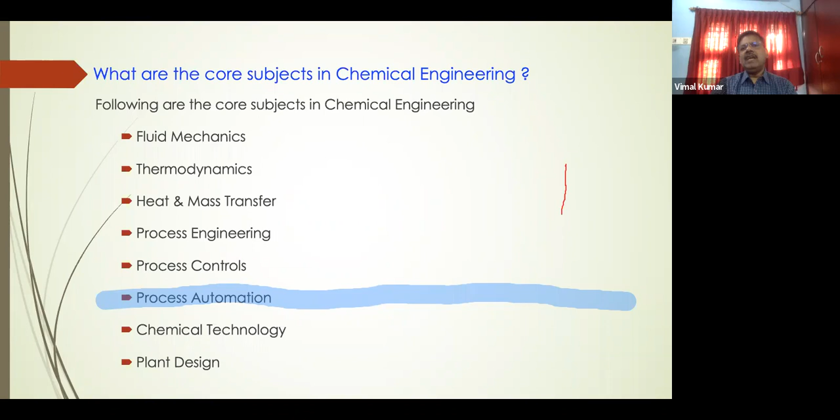Probably, if you are a fresher, maybe you will feel all these subjects are jargon to you. But I will not get into that in detail. Instead, I will try to help you identify which are the areas where you will specialize when you complete all these core subjects. So today I will be talking about 5 major areas where you will specialize when you study these subjects. The first one is machinery and equipment.

As chemical engineers, you will basically be taught about machinery and equipment in your curriculum. So what is machinery and equipment? When you really want to understand this, machinery is something that rotates, equipment is something that is stationary. In all process plants, irrespective of the type of chemicals being handled, there will basically be machinery and equipment. So I will give you a brief of what the machinery is.

If you look at the machinery, you will basically be learning about pumps in chemical engineering. When you talk about pumps, there are two major classifications: one is centrifugal pumps, the other is reciprocating pumps. Each has a different application.

For example, if you take centrifugal pumps, they are used for large volume and medium pressure. The one you are seeing on the left is the centrifugal pump, called multi-stage centrifugal pumps, between-bearings pumps. If you go into the details and classification of these centrifugal pumps, there are a large number of models: cantilever pumps, simply supported pumps, single stage pumps, multi-stage pumps, pumps with gland packings, pumps with mechanical seals. It goes into a large number of classifications.

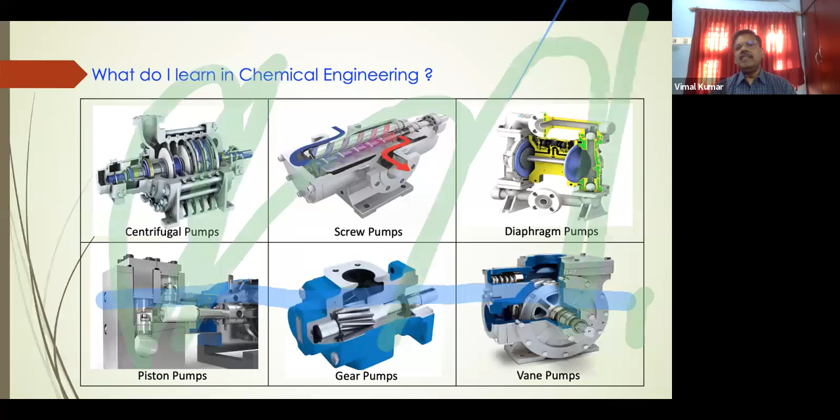So today what you should understand is there are two major classifications of pumps: one is centrifugal pumps, another is reciprocating pumps. Centrifugal pumps are used for handling large volume and medium pressure, and reciprocating pumps are used for high pressure, medium volume. But in both cases, these pumps are basically used to transport process fluid from one place to another. This is the purpose of a pump.

If you go into the detail, there may be a lot of categories like centrifugal pumps, screw pumps, diaphragm pumps, piston pumps, gear pumps, vane pumps, and so on. This is only to give you an idea. There are pumps used in the chemical industry, and these pumps are basically required to transport liquid from one place to other.

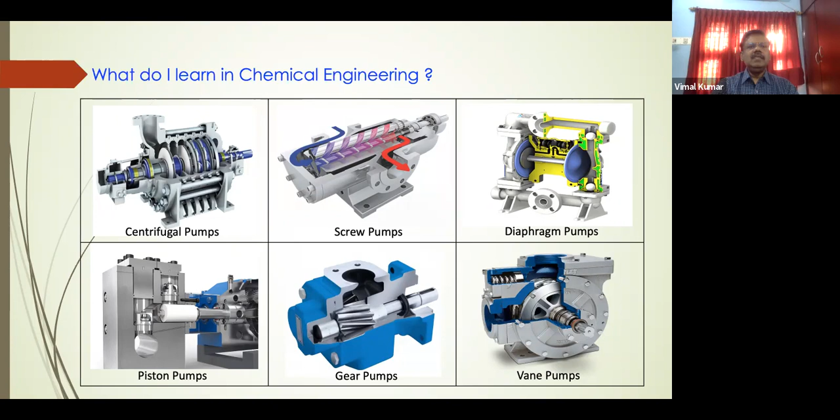Here the same principle applies, but in compressors the centrifugal compressors run at a very high speed. They can go even up to 15,000 and 20,000 RPM. RPM is revolution per minute. Every minute these compressors will rotate more than 10,000 or 15,000 or up to 20,000 RPM. So this is the purpose of a compressor in a chemical industry.

So we have noticed two types of things. One is pumps used to transfer the process fluid. Second is compressors used to transfer the process gas from one place to other, or used to boost up the pressure of the process gas.

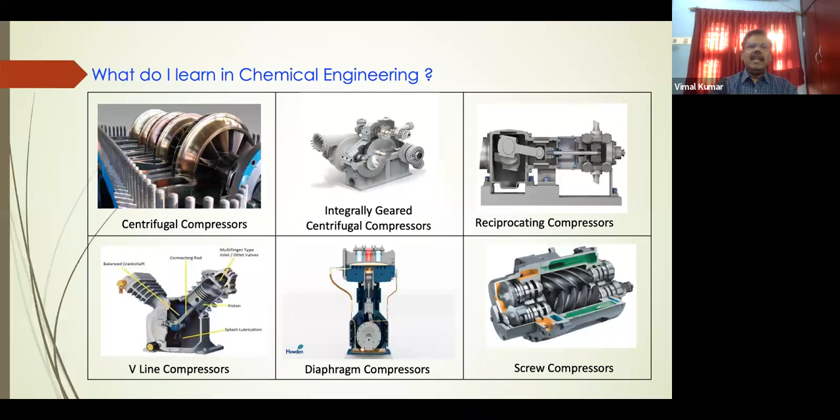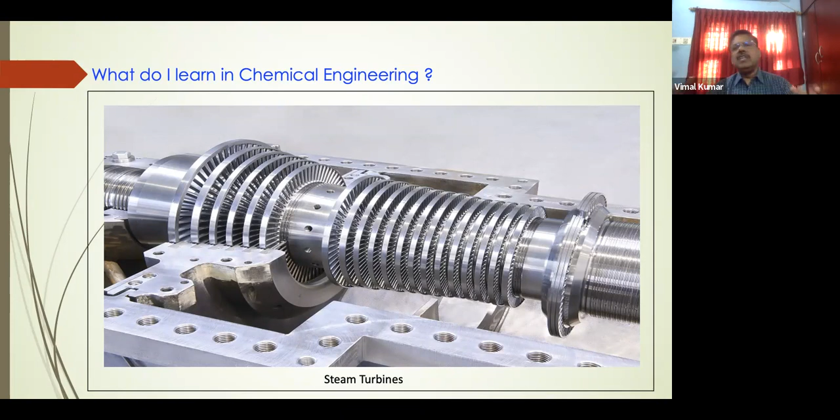So these type of steam turbines are highly critical machineries. Even if you do a small mistake, this will land up in a huge crisis for a chemical plant. So these are given a lot of importance for running a chemical industry. This is very critical. Also, these type of steam turbines are coupled with a power generator for generating electricity. For example, in a thermal power plant, these type of steam turbines are normally coupled with a power generator to generate electricity.

Not limited to steam turbines, there are also gas turbines used to drive the equipments. There is a difference between the steam turbines you saw and the gas turbines you are seeing here. Those blades are called impulse blades, whereas these blades are called reaction blades, which you will understand more in detail in the course of your chemical engineering. These type of gas turbines are used in a huge way in Middle East countries because gas is available in plenty there. So gas turbines are used as a driver equipment for driving the compressor and pumps.

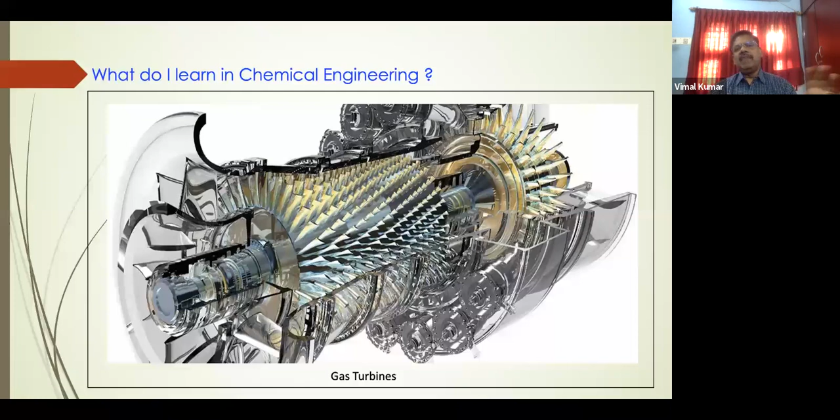Whatever I referred earlier are used in a major way in refineries, oil and gas. Coming to a little low-end plants, like ordinary chemical plants, petrochemical plants, fertilizers, all these plants use some more additional rotating equipments called centrifugal fans. These centrifugal fans do not create a high pressure; they create pressure just above the atmospheric pressure, but they handle a large volume of air. Similarly, centrifugal blowers also develop a pressure just above atmospheric pressure, but they handle air to a limited volume. So they are called centrifugal blowers.

The next one you see is the screw conveyor. These screw conveyors are used to convey the material from one place to other place. The same way, the one on the left corner is the belt filters. The belt filters are used to filter the slurry and separate the solid product from the liquid product. These are used in phosphoric acid plants.

The next one you see is the rotary drums. These are used in cement industries and also in diammonium phosphate plants, mainly for granulation purpose and for homogenization purpose. The next one is the rotary valve, wherein you have to maintain vacuum in the system. These valves are used for maintaining a vacuum in the system, as well as handling the on and off service for regulating the flow inside the vessel.

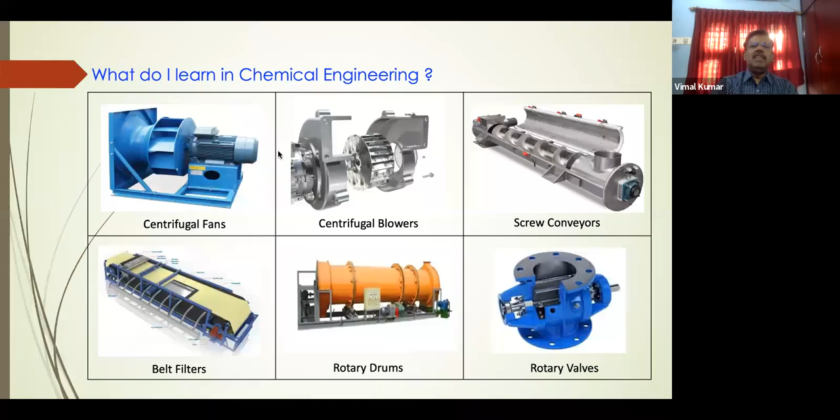Now we will look at some stationary equipments found in any chemical industry. These equipments are available in hundreds. For example, in a refinery, you will find a minimum of 1,000 heat exchangers.

Heat exchangers are used to exchange heat from one medium to another, from liquid to liquid, or gas to liquid, or liquid to gas, without physical contact. The one you see on the top left is a heat exchanger, called a U-tube heat exchanger.

The next one is the stacked heat exchanger, where you need to manage a large volume of fluid. The next one is called the breech lock exchanger, used for handling process liquid or gas at very high pressure, requiring a proper sealing arrangement achieved through breech lock heat exchangers.

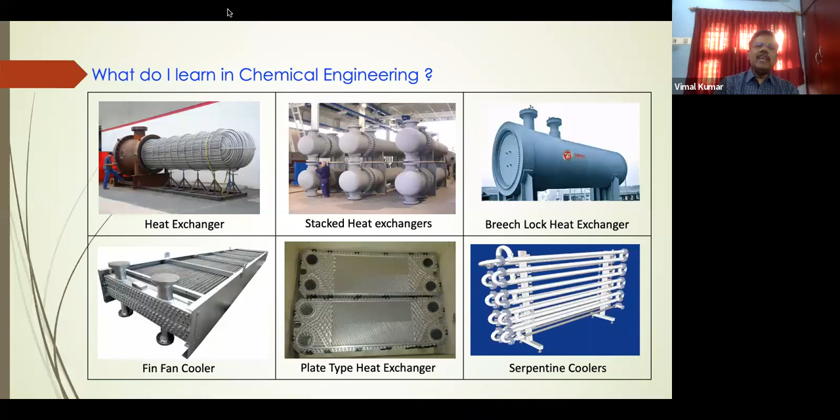To consolidate, there are four major types of heat exchangers used in chemical industries: fixed shell and tube heat exchangers, U-tube heat exchangers, floating head heat exchangers, and kettle reboilers.

Every heat exchanger has a different purpose, and each has a different operation and maintenance methodology. Now we will see how you get a feel of what a heat exchanger is, and how you take out a heat exchanger for maintenance.

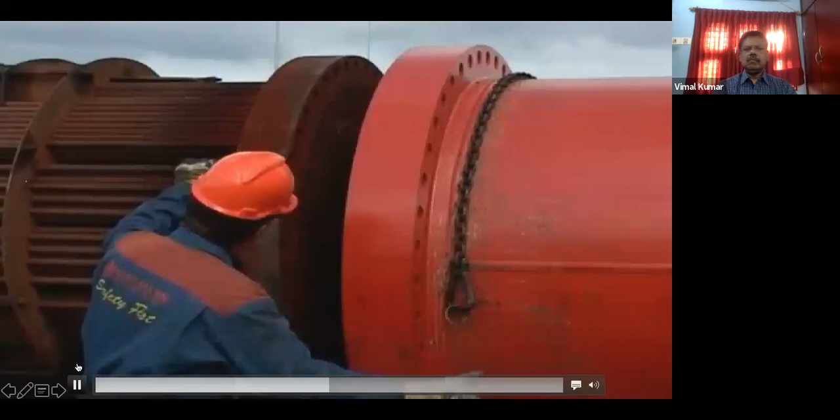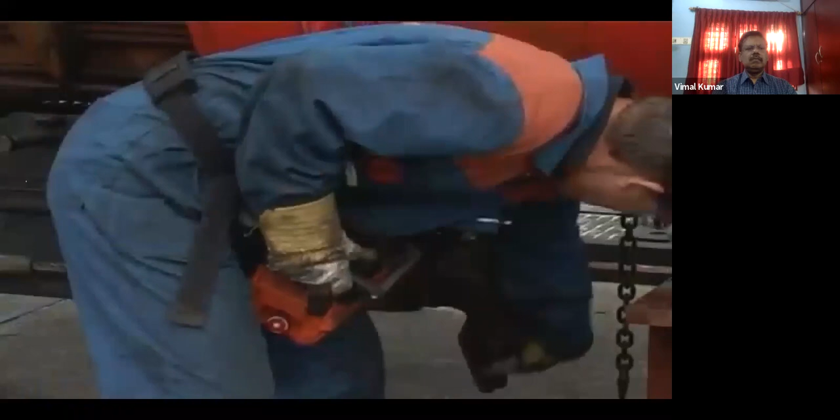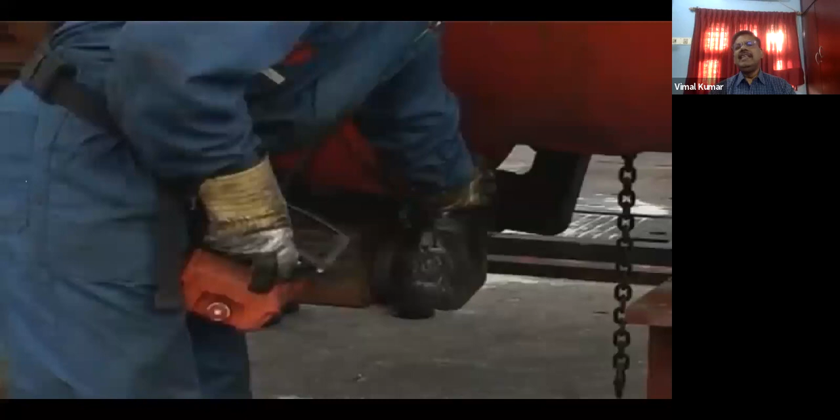What you have seen is a hydraulic method of pulling out a tube bundle from a heat exchanger and then putting it back after cleaning the tubes inside and outside. These are called bundle pullers, now widely used in refineries because of the weight involved and, from a safety point of view, all chemical industries recommend the hydraulic method of pulling out tube bundles.

Thirty years back, when I was a maintenance engineer, we did not have this technology. We manually pulled out tube bundles using chain blocks and other mechanical tools, but that is no longer allowed in refineries. What you are seeing now is the recommended method for pulling out the tube bundle.

You will also notice how the tubes are cleaned.

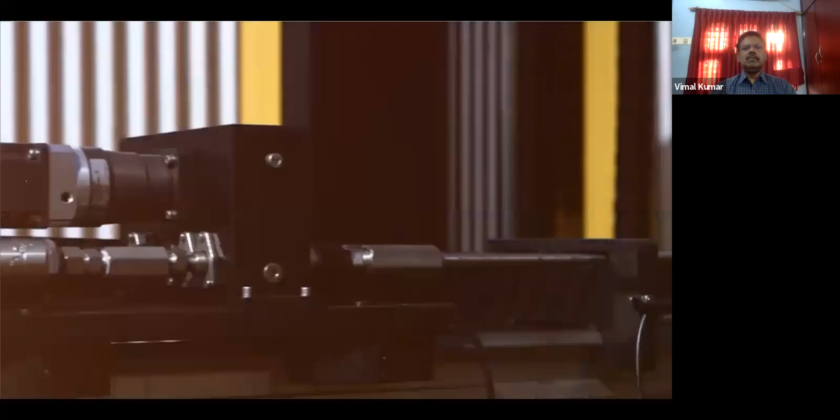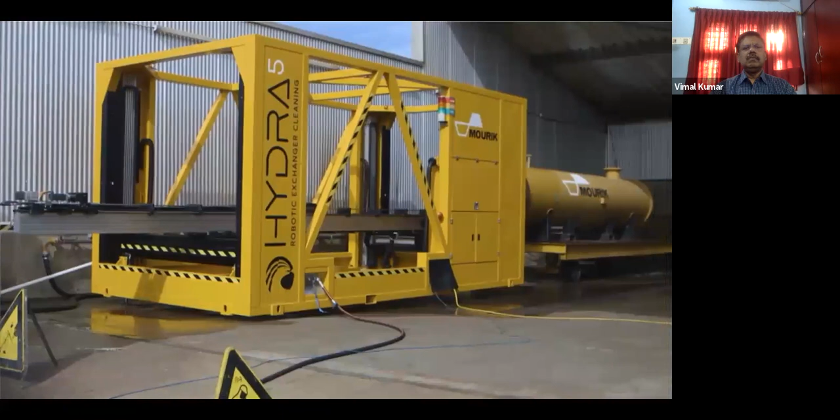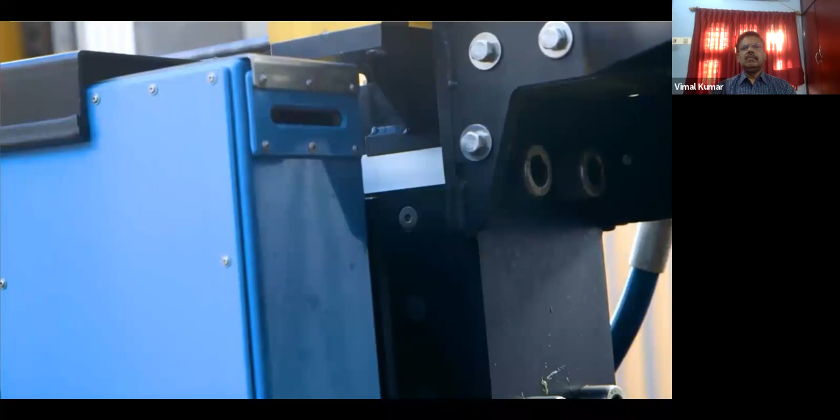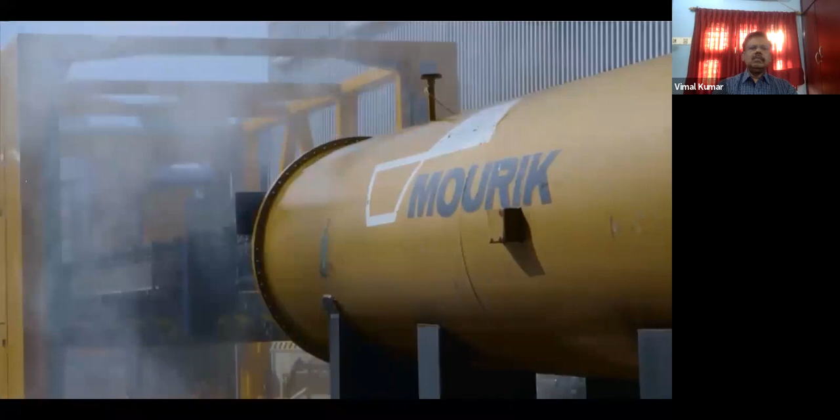We believe we're on the eve of a revolution in industrial cleaning, a world in which robots collaborate with humans to do professional jobs safely, in control, and of immaculate quality. This world is no longer science fiction. Today, Mourik takes the next step into the future: Hydra. The new Hydra 5 enables Mourik to be the first to move automatic internal tube bundle cleaning from a lab environment into real practice. Hydra reads its environment and ensures unrivaled cleaning without human intervention. Five rotating lances autonomously clean the tube bundle with a powerful high-pressure jet, all at maximum speed and pinpoint precision. Hydra constantly monitors all parameters and adjusts its method to avoid damage. The increased speed and efficiency result in substantially lower consumption of water and fuel, mitigating the environmental impact.

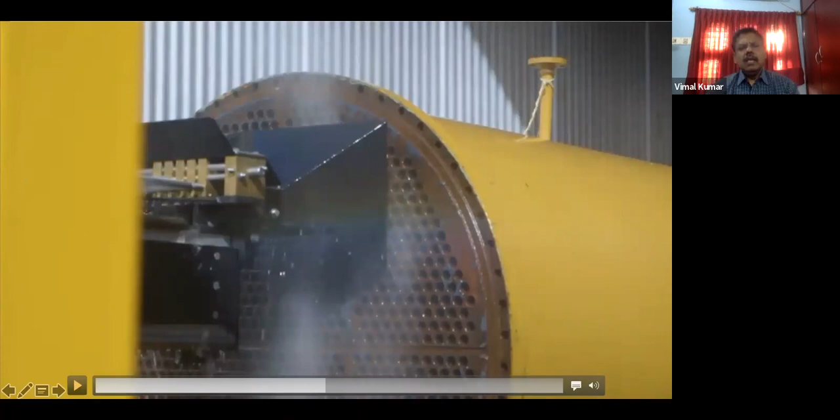In those days, this cleaning was happening manually, but that is no longer the practice now. Things have improved a lot, with complete robotics now used in cleaning heat exchanger tubes. This has taken over the whole market because of the speed, precision, and safety it offers.

So this is what we have seen, and these exchangers are nowadays cleaned with high precision robotic machines. No more manual cleaning is involved. But from a chemical engineer's point of view, all these operations come under your control. You are the person who is going to operate the plant. You are in charge of a plant. Every single activity in a process plant will happen only with your knowledge and clearance.

So now, next to the stationary equipment like heat exchangers, what you are seeing now is a fired heater or a furnace, wherein heat is again exchanged. But here what happens is, you will be firing with a fuel oil or a fuel gas inside a closed vessel or a closed furnace, which will help to crack the heavy hydrocarbon chain, which will help you to break or vaporize the heavy hydrocarbon chain. This is the purpose of a fired heater.

Once the hydrocarbon chain is broken, the gas gets passed to a catalytic reactor. These are all equipments highly critical for an operation engineer from the operating point of view, because these catalytic reactors are filled with catalyst to aid the reaction, to help the reaction, to accelerate the conversion. So these reactors again fall into many categories. There are fixed bed reactors, there are catalytic tube reactors.

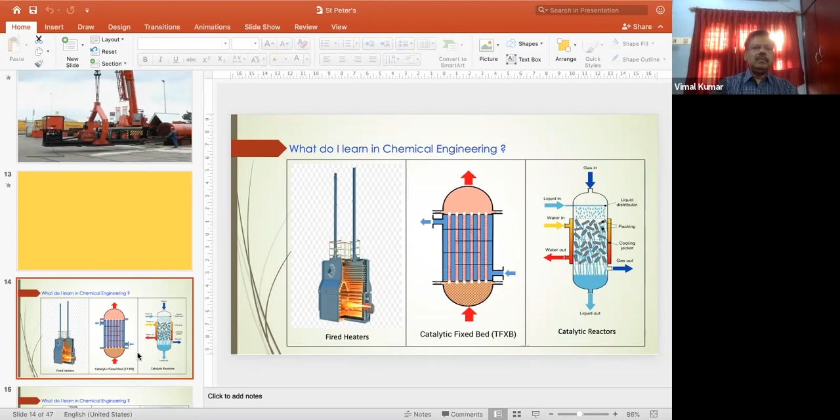So the next one will be the fractionator, absorber, regenerator. Actually, in a refinery, the heart of a refinery is the fractionator. What is actually happening in a fractionator is, all different types of product or end product are taken out based on the boiling point. For example, kerosene, petrol, methanol, ethanol, coke, hydrogen. So in this fractionator column, at every stage, based on the boiling points, the product is taken out.

For example, ATK, aviation turbine kerosene, the kerosene which is used in aircraft, is taken at a different stage. The kerosene used for domestic purpose is taken at a different point. The petrol is taken at a different point. Then you have coke, the residue that is collected at a different point. Then methanol, then hydrogen, something like that. The fractionator is the heart of a plant. So you will learn a lot in your chemical engineering about this fractionator.

The same concept applies for the absorber. What is really happening in an absorber is, when you collect the gas, it will have a lot of unwanted gas in it. For example, acidic gas will be present in the end product. So we want to remove that unwanted component. How do we remove that? That is called amine regeneration, amine absorption. For example, you will charge lean amine solution to go and scrub the acidic gas, which is called absorber. So that gas, when it comes out, will have the acidic gas completely absorbed. So if you take out the fuel gas, it will be acidic gas free.

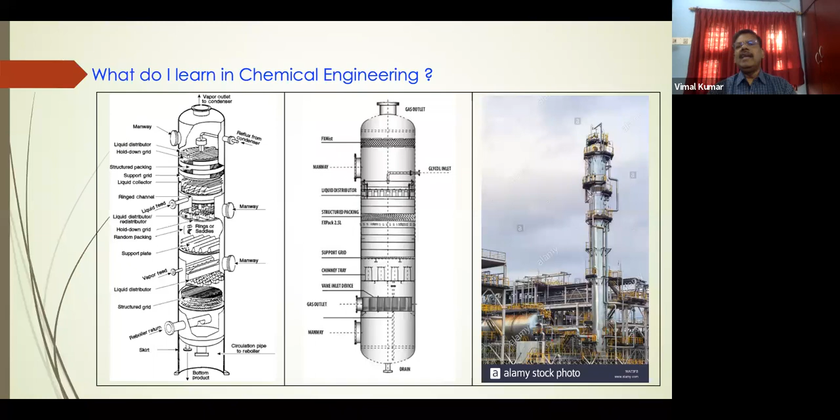Now, when you really understand all the basics and fundamentals of the machinery plus equipment. So all along you have seen rotary equipments, wherein you saw pumps, then compressors, then turbines, then a lot of low-end rotating equipments. Then you saw some heat exchangers, then fired heaters, then absorber, regenerator, fractionator, distillation column. Then you saw catalytic reactors. All these things, irrespective of wherever you are going to work, all these things will be present.

So once you understand the basics of operation of these equipments and machinery, that means you are fit to understand the process flow. What is process flow? In a chemical industry, you need a combination of rotary and stationary equipments to convert the raw material to your end product. This is called a process flow.

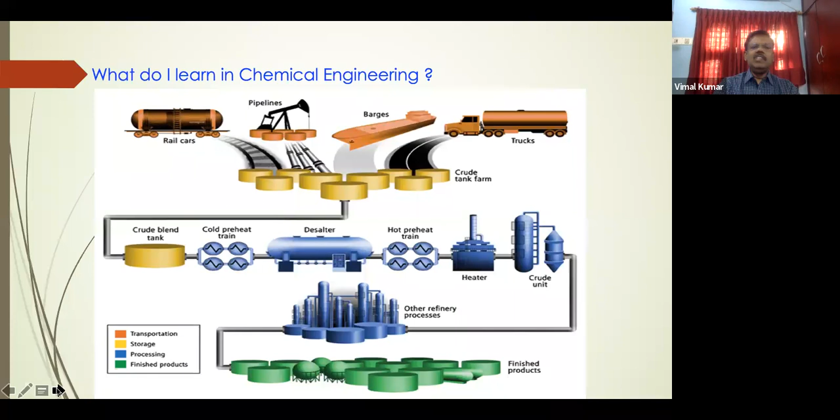This is, as I told you, the heart of a refinery. The crude is being heated up, then it enters into a distillation column. Based on boiling point, at different stages, the end products are taken out: gas, naphtha, gasoline, kerosene, gas oil, lubricating oil, heavy gas oil, and residue. So this is the heart of the plant, wherein you will become a master to know the in and out of a distillation column, and understand all the basics of this operation and the process flow.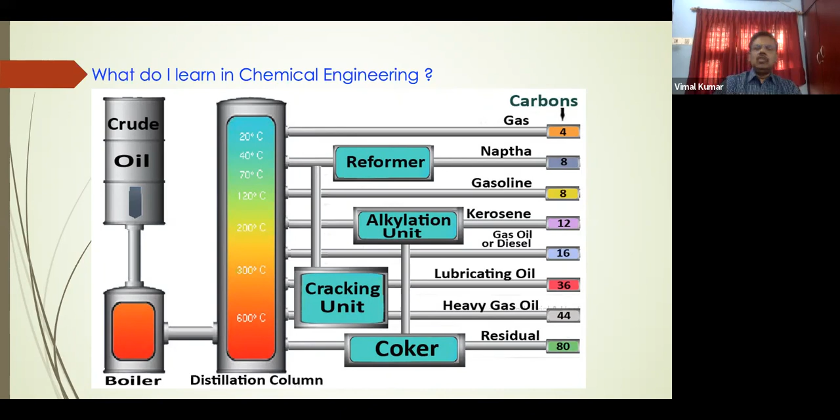How does this process really happen? This will be clearly understood by you in a process flow study. So, for example, I feel you should really see this video clipping, because you will clearly understand what is really happening in a refinery.

From the outside, an oil refinery looks like a small city - a city composed of pipes, tanks, and towers. But if you went inside, you might be surprised to find one of the most technologically advanced industries in the United States. Here, engineers and scientists have figured out how to turn raw crude oil into the valuable fuels, lubricants, and components we need to make millions of products.

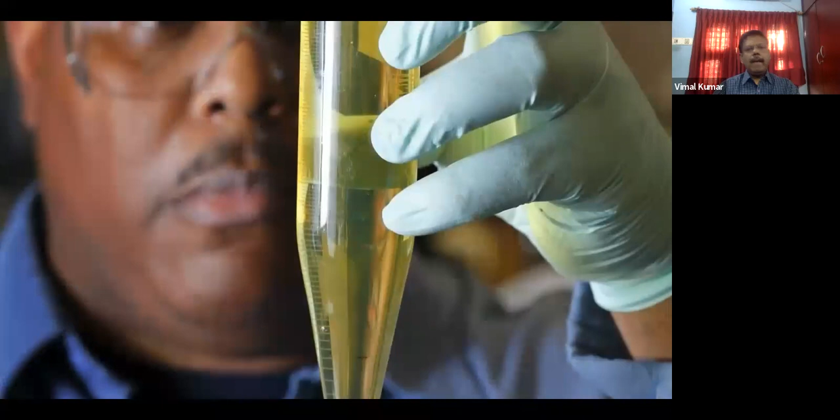Refining begins with a process called distilling. After oil is superheated, it becomes vapor. The vapor is fed into the distillation unit. As it rises and cools, the vapor turns back into a liquid. Using stacks of trays, the liquid is easily collected and separated by weight. The lighter and medium weight liquids require less processing before they're ready to be used in cars and trucks. The heavier liquids need more processing to become useful.

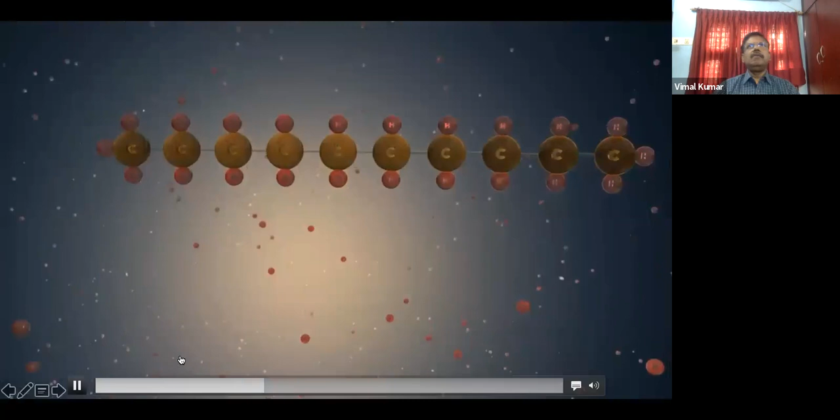A process called cracking is used to maximize the usefulness of heavy oil. Heavy oil has long strings of carbon and hydrogen molecules. Using a catalyst, these molecules can be broken into smaller chains, transforming the heavy oil into lighter, more valuable fluids.

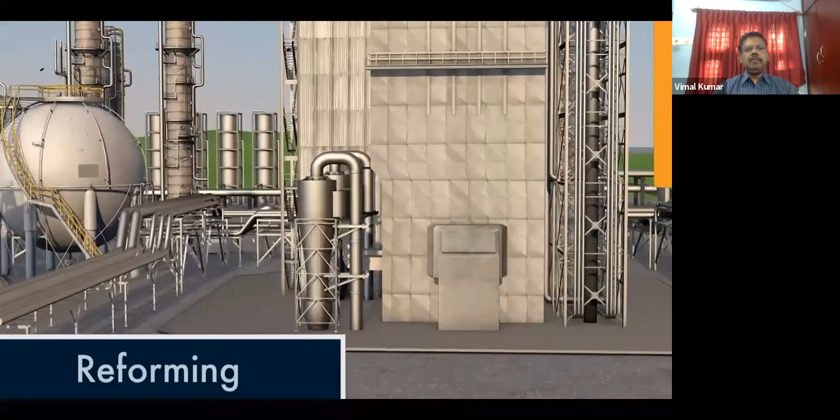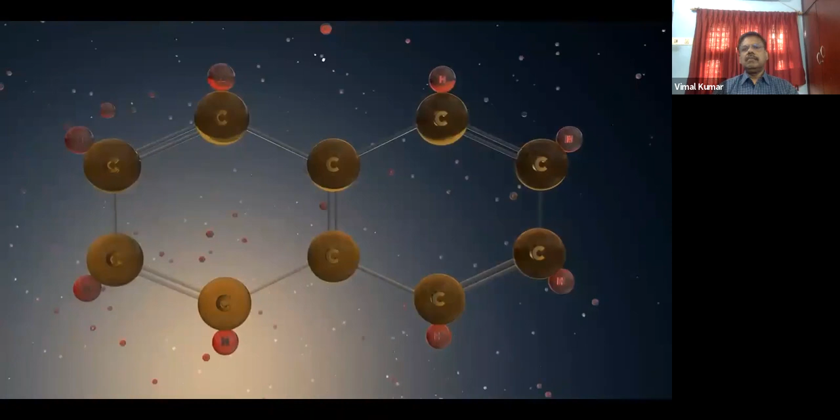Reforming is a process that increases the amount of gasoline produced from crude oil. One of the products separated in the distilling process is a liquid called naphtha. The number of carbon atoms in naphtha is about the same as the number found in gasoline, but their structure is more complex. Reforming rearranges the naphtha molecule, turning it into a usable gasoline-like molecule.

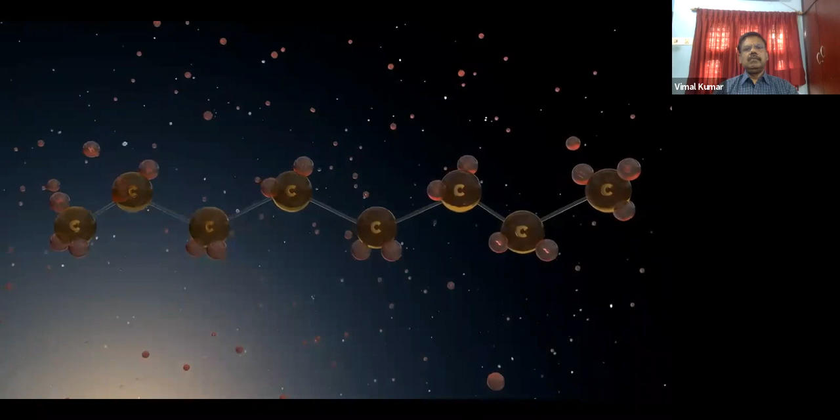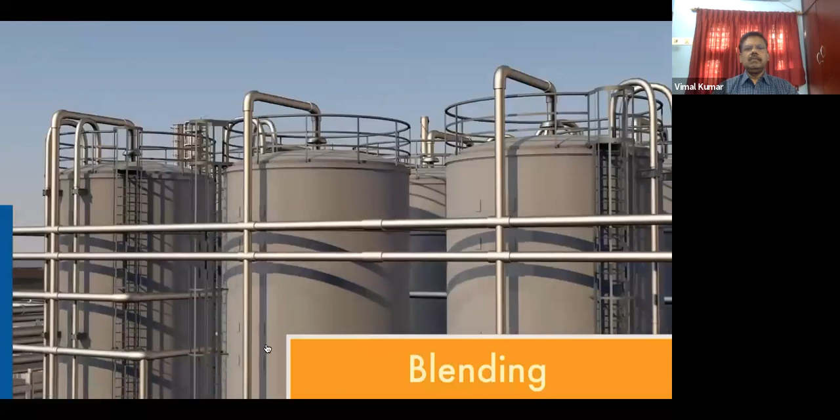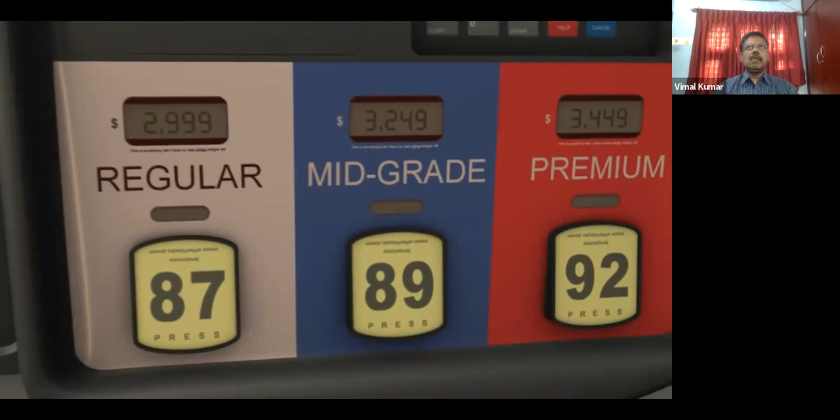Blending is a process of mixing different refinery products to make finished petroleum fuels. Gasoline, for example, is blended to achieve octane standards, creating the grades of gasoline you see at the pump: regular, mid-grade, and premium, that are necessary to meet the needs of specific engine types.

Treating is a process used to... I think now you should really feel proud of operating such a big refinery. Chemical engineers are the people who operate this complete refinery. So you should feel really proud to control the whole refinery.

For example, in India, there are so many refineries, but they are basically governed and operated by chemical engineers. Only then do the downline engineers come - for example, mechanical engineers, electrical engineers, instrumentation engineers, civil engineers - all these people are there to serve the chemical engineers. So chemical engineers should be very proud to operate a refinery in India, because you are the people who feed a variety of products to the country.

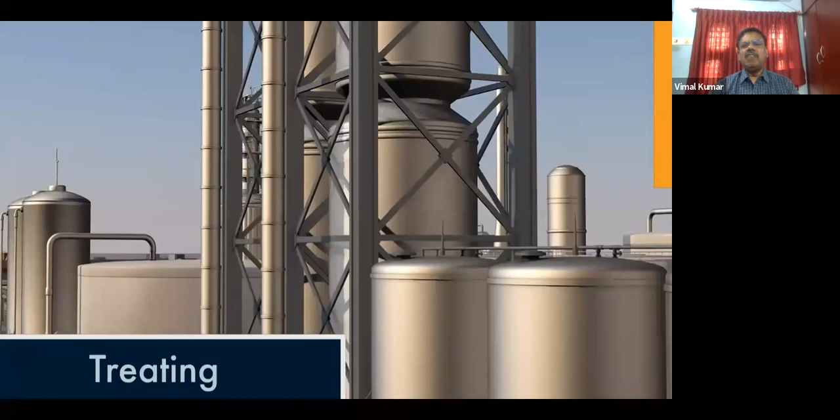Now, the moment you understand the complete process, you are fit enough to develop a process flow diagram, PFD. This is what really matters. So this process flow diagram, you become very conversant to read this process flow diagram.

This is what will be available in the refinery, or anywhere - these are all the documents available for you. So if you really become conversant in reading a process flow diagram, you will very easily understand when you get into any refinery what is really happening, what is the raw material, what is the end product, what type of equipment is used, what rotary machinery is used. If you see this process flow diagram, you must be able to understand there is a distillation tower, there are pumps, there are heat exchangers, there are various filtration units, there is a desalter - all these things you will be able to understand.

So now that means you have become an expert, or you have specialized on equipments and machineries, then you have specialized on process flow. So now you get into the third stage of your engineering curriculum, which really makes you specialize in process controls. What is really process control?

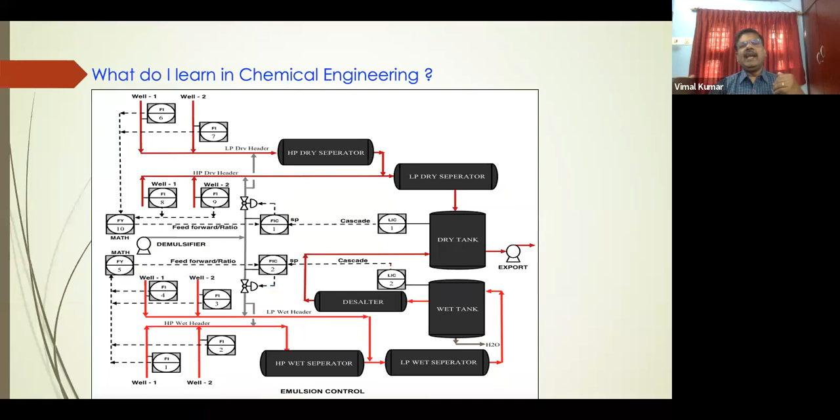So this is process control. The earlier diagram you saw was a process flow diagram, which was not having any control circuit. But if you see, this circuit is having a lot of controls. So for example, those diagrams are called PFD, process flow diagram. This is called P and ID, piping and instrumentation diagram.

So if you see in this image, you can see there are a lot of controls. For example, you need a controller to control the flow, a controller to control the temperature, a controller to control the level, and a controller to control the flow. So all these parameters you will be controlling by sitting in a central control room, which is operated by DCS, distributed control system. But also you should understand...

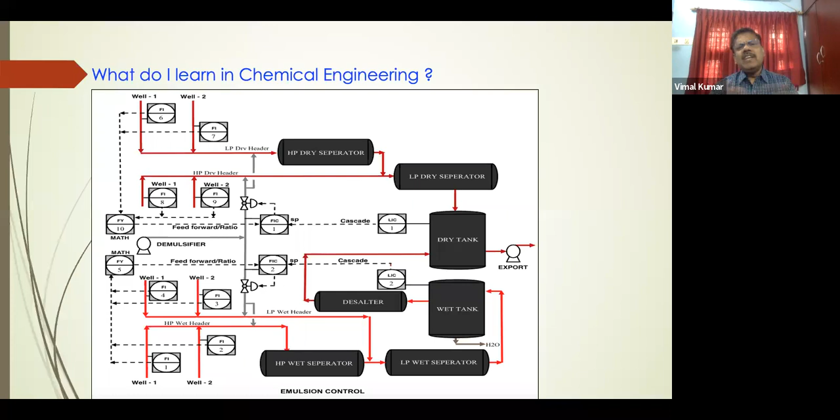Myself, I am a 30 years experienced in refinery. I belong to this category. The reason is I belong to a third generation category, whereas it is not the case for you. You are a fourth generation category. So what is the difference between third generation and fourth generation?

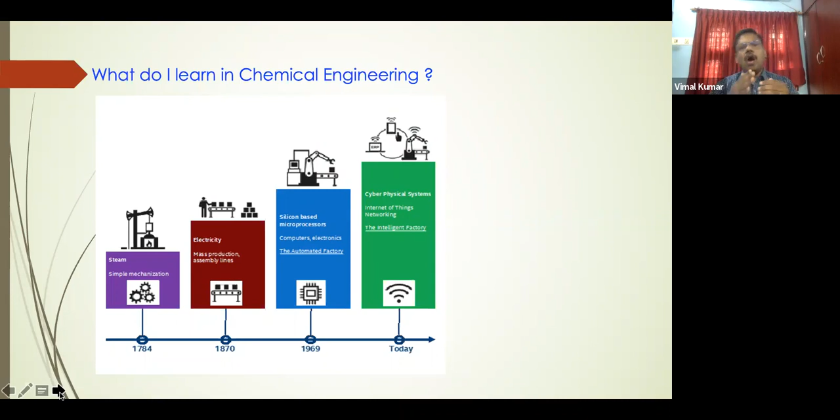This is the difference. The first generation was mechanical control. The second generation was electrical controls. The third generation, where I used to work, is electronics control. But today the whole world scenario has changed, and even the refinery has adopted the change where you, the fourth generation people, operate a chemical plant which is presently getting converted into IoT control, Internet of Things. So most of the controls in the refinery are getting converted into Internet of Things, IoT control.

This is what you are seeing now. Now this Internet of Things has gained momentum. So your life is getting more and more easy. You don't need to go around the plant to look for abnormalities, to look for any issues, any problems. You can sit anywhere to control the process parameters. This is what has really made a big impact on the present fourth generation engineering.

So all these things, for example, the crude oil unit will be located elsewhere, the tank farm will be located elsewhere, your refinery will be located elsewhere, but still you can sit in New York and control this. So that is what the Internet of Things gives you, an access to control your plant from anywhere. And also from the safety point of view, it helps you a lot. It helps you identify the issues, identify the gas leaks, identify any unwanted entry into the plant facilities.

I want you to see a small clipping on this.

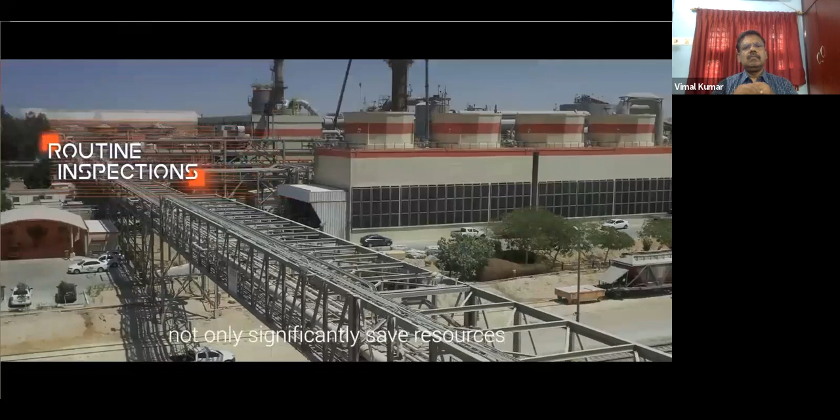This is a large mining facility. The possibilities for drones to create real value in a facility like this are endless. Let's see a couple of examples. Routine inspections with drones not only significantly save resources, but also prevent endangerment of employees performing them. Drones are also uniquely qualified to measure stockpiles like these, which has tremendous value in calculating inventory and preventing waste.

So are you able to understand? See, these type of drones are too much useful today for making a quick survey, quick inspection. Human intervention is not required. Then from the safety point of view, it is much, much helpful for our regular day-to-day activities in a chemical industry.

So we saw two things. One is Internet of Things has captured the industrial market. The second one is the drones, which the third generation engineers have not at all used, whereas you will be exposed to such type of advanced technology. So you can feel proud to be a chemical engineer.

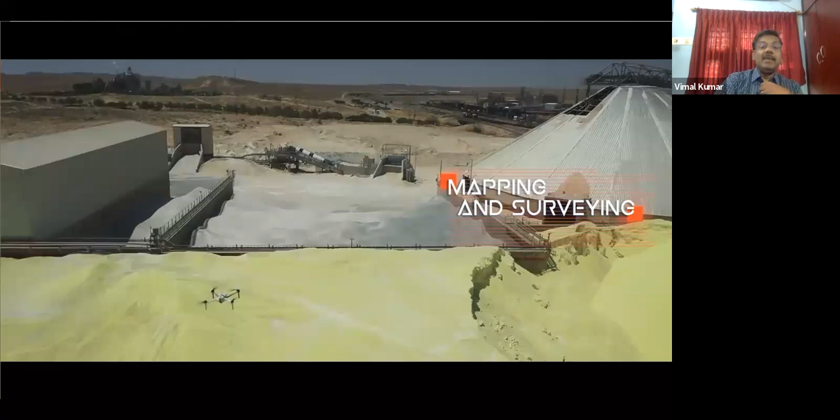So the next one, what is really happening in the chemical engineering field, in a chemical industry, is augmented reality, mixed reality, artificial intelligence, machine learning, chatbots. So all these things are gradually impacting the market in a big way. They are much, much helpful in a chemical industry.

If you see, your boss will be sitting in New York, you will be sitting in Chennai controlling the refinery, but you will invite your boss in New York to go for a walk around with him if augmented reality and virtual reality are mixed up. So today that's really happening.

For example, today chemical engineers are involved in designing a plant, you can see it in the picture. Plus, these tools are now taken inside the plant to detect any abnormalities, any gas leaks, any inspection activities. So you should be really happy and proud to know that chemical engineers are the engineers who really convert this world into a fourth generation market.

You will be really incorporating the technology of IoT, the technology of drones, the technology of augmented reality, virtual reality, mixed reality, then artificial intelligence. Artificial intelligence has really impacted like anything. It really helps you. Machine learning, for example, you have a problem in a compressor, it will advise you, the machine learning will guide you. Last year there was a problem like this, so you do the same operation, it will guide you, it will help you. So those type of real technology has impacted the process industries.

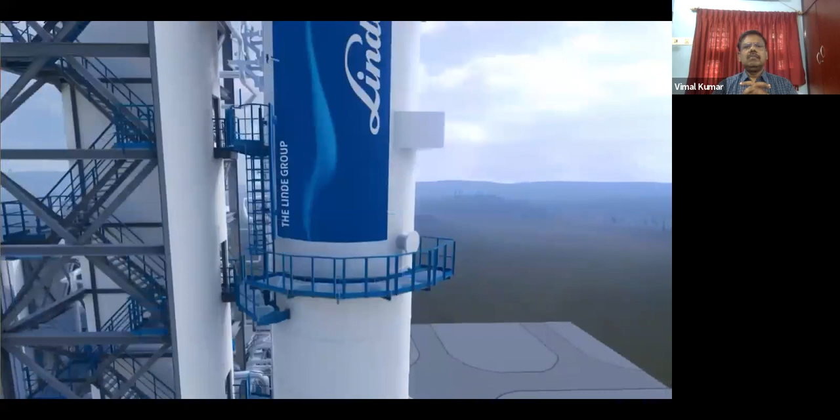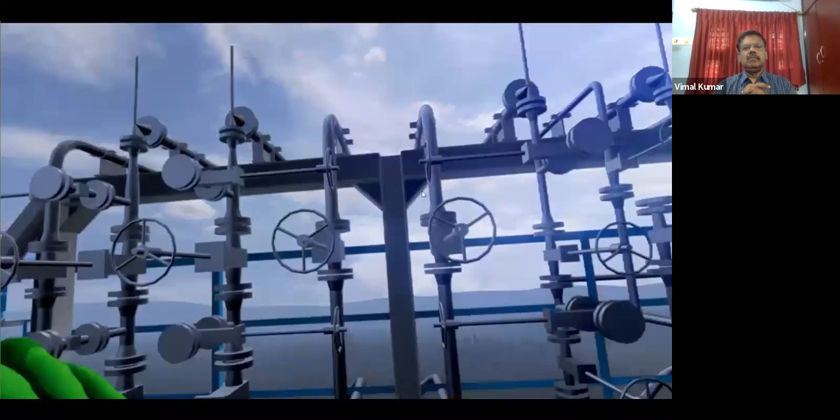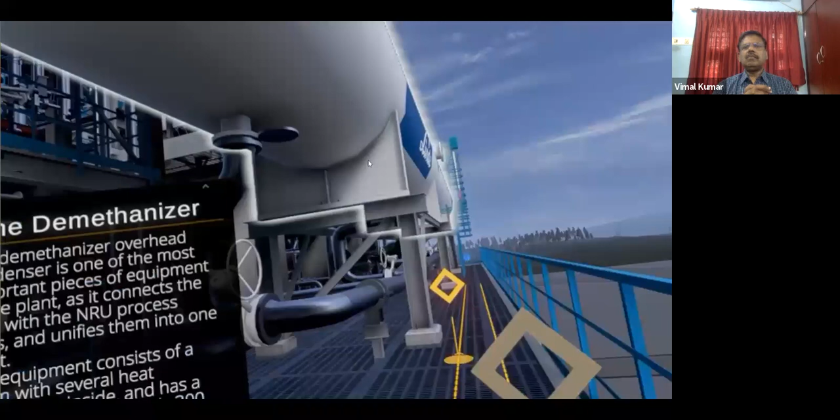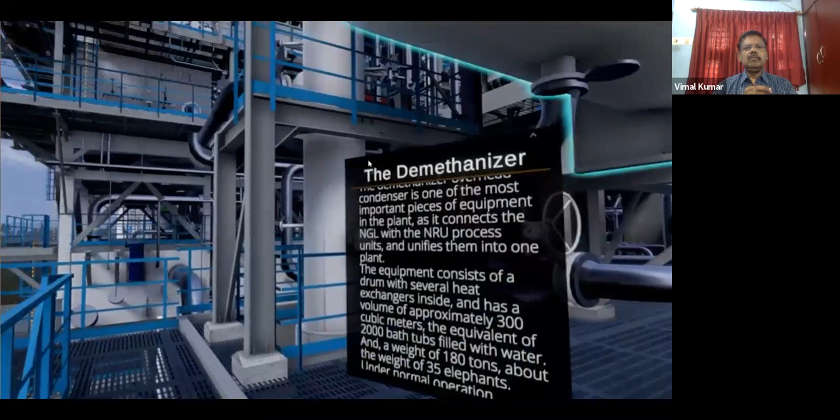At Linde, we are on the lookout for innovations that can help our customers in new and often unexpected ways. Imagine if you could walk around and train in facilities long before they were physically built. Linde is currently working on virtual reality training that can revolutionize how we educate and train operators. With these digital twin environments, we can ensure that your people know how to navigate the space and understand where the right components are located.

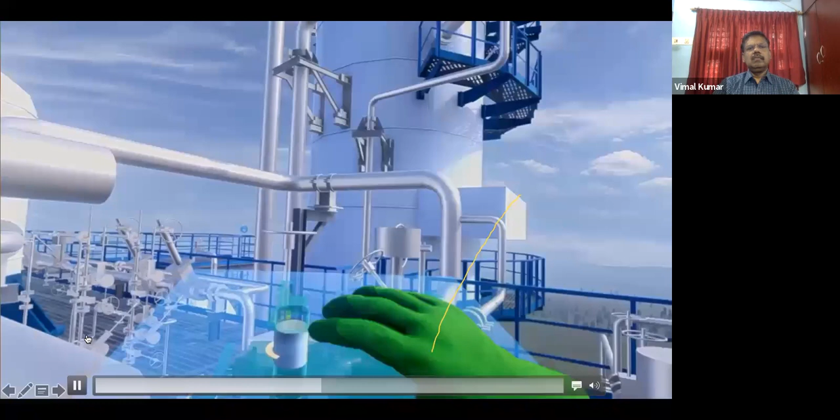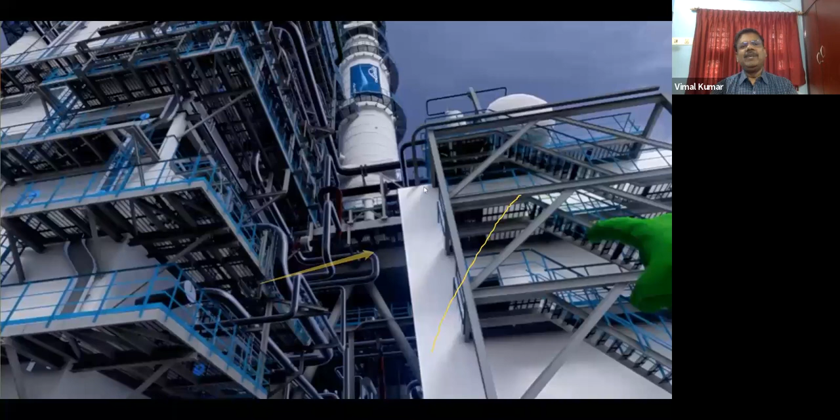So now this is no more a fun game, this has become a reality in our lives, a reality in a chemical engineering life, a reality in a process industry. So in future you will enjoy working in a chemical industry. Being a chemical engineer, you will be the authority to operate a plant, whereas all other categories of engineer will fall under your category. So you must be proud to operate a chemical plant.

So we saw three things: one is the equipment and machinery, the second is the process flow, the third is the process control. So once you are thorough on these things, you become a full-fledged chemical engineer to operate a plant.

What is really operate a plant? We are now going to operate a chemical plant. What is operation? When you operate a plant most efficiently, this is what is very important. See, you have a raw material, you have to achieve the end product. So how well you operate, how efficiently you operate, which helps you to achieve the end result in an economical way, that is only very important.

For example, what you are seeing is a pump performance curve. So you know the pump you operate, and you know what is the pressure, what is the temperature, what is the speed, what is the volume it has to be operated at to give you the best efficiency. For example, if you go through these curves, you can very easily understand which is the BEP, best efficiency point. So you will become an expert in operating a pump at the best efficiency point.

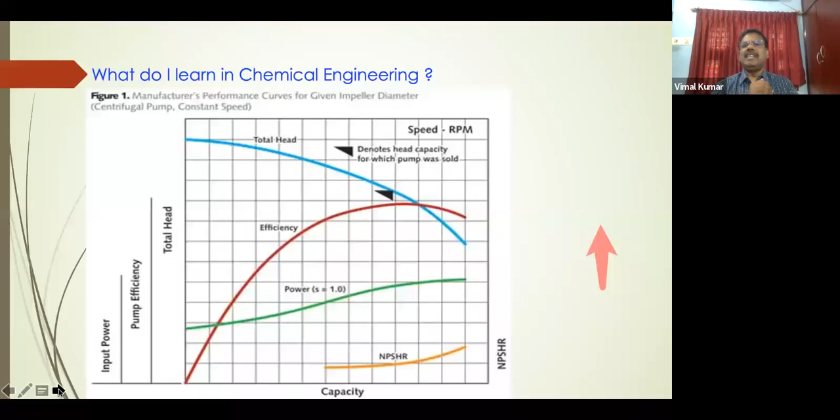So all these things you will get to understand when you get inside a process industry. The same is applicable for a compressor. When you talk of a compressor, you will know what is polytropic efficiency. The efficiency of a compressor is measured in terms of polytropic efficiency because these compressors can vary their speed. As I told you before, these are operated by steam turbines.

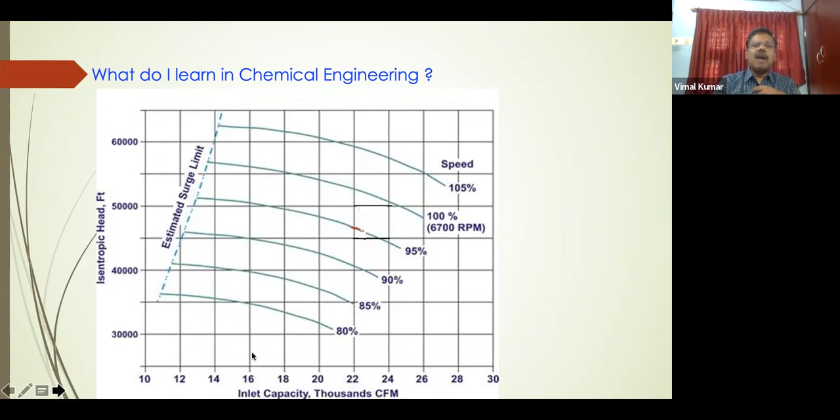Steam turbines are governed by speed control mechanisms which help you control and vary the speed. These polytropic efficiency curves help guide you to the safe operating point and the best efficiency point for operating a compressor. The similar concept is applicable for steam turbines also.

You will learn a lot about isentropic efficiency from steam tables in your chemical engineering curriculum. You will very thoroughly learn about these three things in your curriculum.

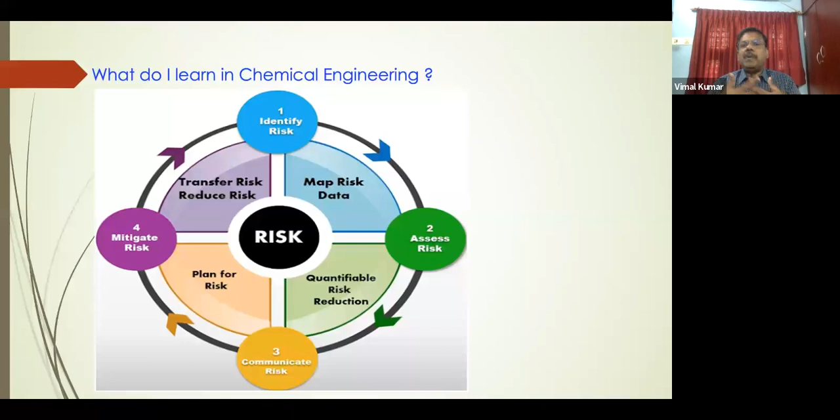Having learned to operate a chemical plant or process plant, it doesn't stop there. You have to operate the plant in a very safe manner. That is what is called hazard analysis, hazard and operability analysis. Whenever you operate equipment by equipment, machinery by machinery, you will identify the risk, assess the risk, communicate the risk, and mitigate the risk. The more you get into the refinery and become more specialized in operation, at one point you will become a hazard operation expert. So you should really understand this.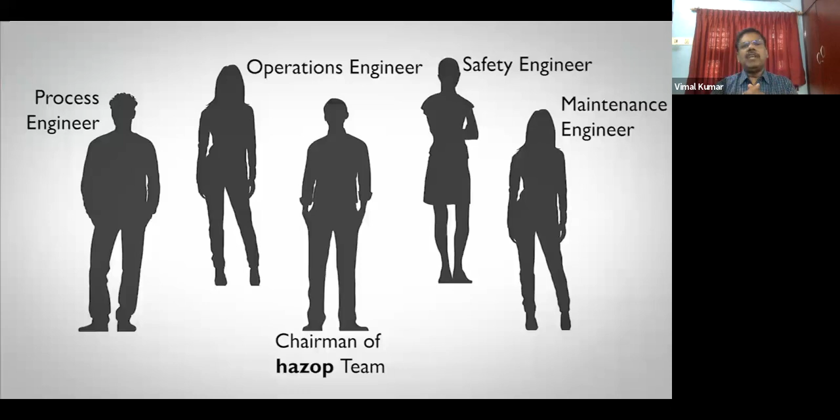Having known these four parameters - one, you got specialized in the operation of equipment and machinery; then you went in for process flow; then process controls; then you learned how to operate a plant - now you are going to conclude the fifth one: process simulation. That means you have become a thorough expert on operating a plant.

The next stage, or dream of a chemical engineer, is process simulation. That means I want to do some changes, or troubleshoot, or modify, or do reliability improvement, or design a new thing for my plant. So this simulation is going to help you in a very big way.

Today, St. Peter's College of Engineering and Technology encourages and teaches you process simulation, because the software itself costs a lot.

But one thing you should understand - once you gain all those four specializations, you will enjoy working in process simulation. That means you are imagining something and giving all the inputs to that simulation software to get it done and achieve the result. This is what process simulation is.

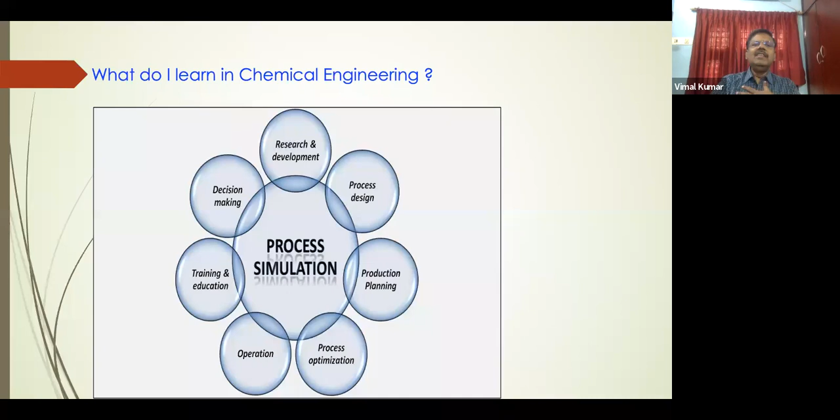That means you will be involved in research and development, design, planning, process optimization - so many interesting things will happen. This is what process simulation software is about.

I believe this is very much available at St. Peter's College of Engineering and Technology, and they will give you beautiful training on this, because this is the ultimate objective of a chemical engineer. This is the ultimatum, I would say, because the whole plant will depend on you for any abnormalities, any design changes, any improvements - all these things will depend on you.

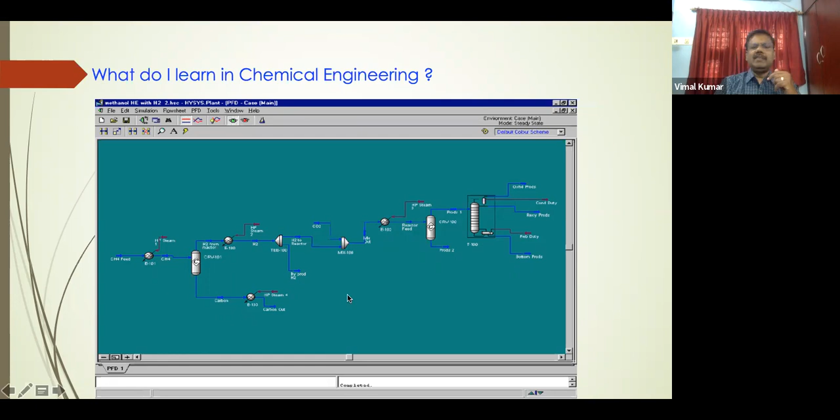Today there are wonderful softwares to help guide you to do this simulation. There are so many simulation packages - this is another simulation package, and this is another one. There are so many packages like ANSYS, AspenTech, Unisim, and many more in the market.

But learning this simulation during the curriculum is something unimaginable. It was unimaginable during our days, but today it has become a reality - they teach you all those things.

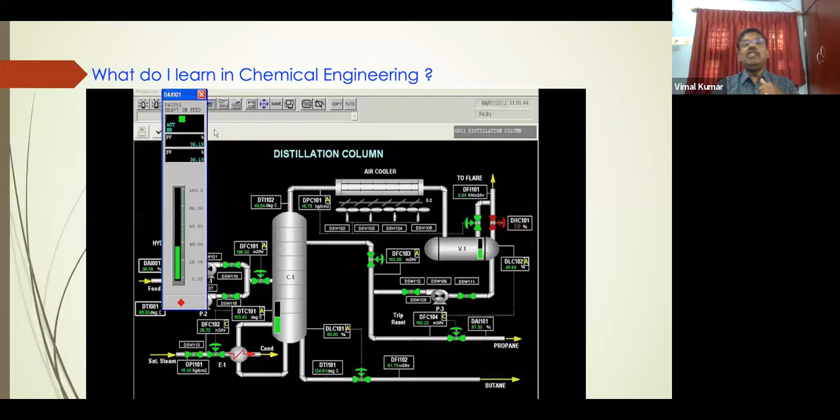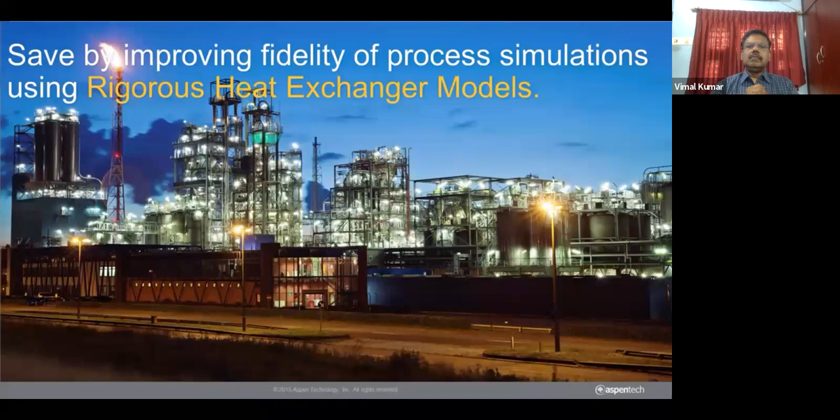With the V8.8 version of Aspen Plus and Aspen HYSYS, users can now specify known heat exchanger geometries to create rigorous heat exchanger models from within the process flow sheet. Users capture considerable savings on energy, capital expenditures, and operating expenses from high-fidelity process simulations developed using rigorous heat exchanger models.

In addition to being able to size heat exchangers, users can now easily specify existing heat exchanger geometries and convert simple heat exchanger models to rigorous models without leaving the simulator. The new home ribbon guides users progressively through the design workflow. Follow the ribbon to enter inputs.

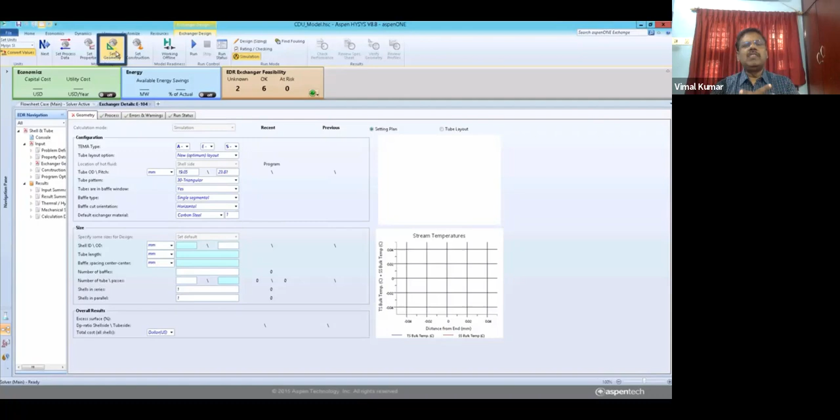Are you able to understand? Today, high technology software is available which facilitates you to design a heat exchanger. I told you earlier, heat exchangers are available in 1,000 numbers in a refinery. If you are an expert to design an exchanger, just imagine your position in a refinery. When you are a fresh engineering college graduate, going with all this knowledge stuffed in your brain, you have great recognition in the market. Nobody can beat you. So that is where you should really go into the right curriculum. Your learning in the curriculum is very, very important.

So same way, for example, this is a simple cyclone simulation. The simulation of a cyclone separator, how the materials are getting separated, how the heavy particles are getting settled down, and what is the micron size. So you give the input, you know the output, so the simulator will design the cyclone separator for you. So the technology has advanced so much, it gives you a lot of learning and expertise. Today it is not available with older generation people. You are a new generation people. You are filled with knowledge.

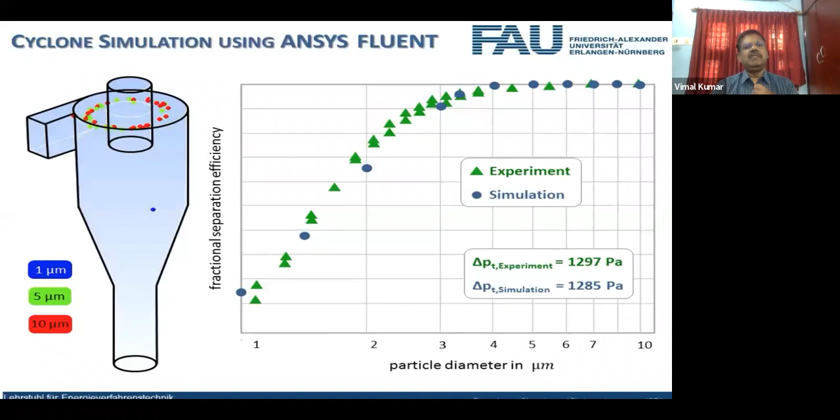So now we have completed all these things, and having completed them, I would say these are your dream jobs. You have a lot of openings in refinery, oil and gas, petrochemicals, fertilizers, under three major categories. One is you are required as an operation engineer. You find a large opening in construction management. Then you are also required as design engineers. But I would say today's market is looking for young and energetic chemical engineers who have knowledge of all the 5 things we learned today. Whenever you are meeting a client or presenting yourself for an interview, if you say that you are a master, a specialist on all those 5 things, people will really take you like anything.

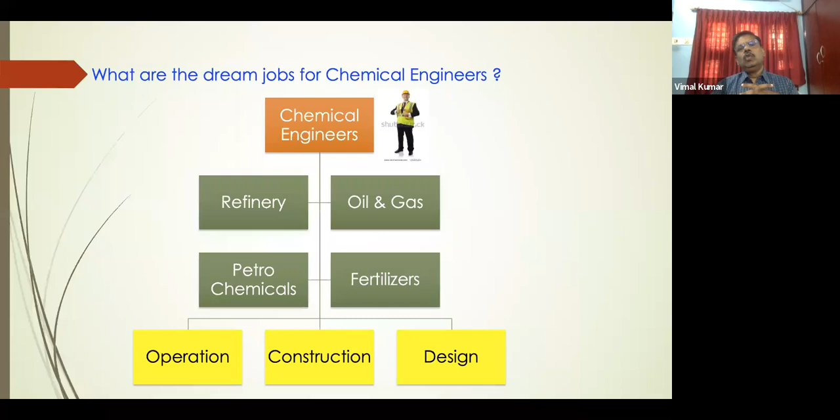So when you go down here, these are all the various clienteles. Today you have in Chennai itself CPCL refinery, BPCL, HPCL, IOCL, SPIC, Essar, Reliance, all these refineries. You have a huge opening if you specialize on those things. But not limited to India, you have huge openings in MENA, Middle East and Africa. You have KNPC, Equate, KIPC, Saudi Aramco, Gasco, GPIC, Takreer, a lot of things.

But I should openly admit, and feel proud to present, that I have almost worked in all these places in my 32 years of experience, because my specialization is in refinery, oil and gas. I have worked throughout the Middle East and throughout India. So I wish you all the best to choose a career in chemical engineering, which is very, very prospective. I think you have chosen the right college. St. Peter's College of Engineering will impart knowledge on all the subjects we discussed today in your curriculum, that will help take you to heights in your career.